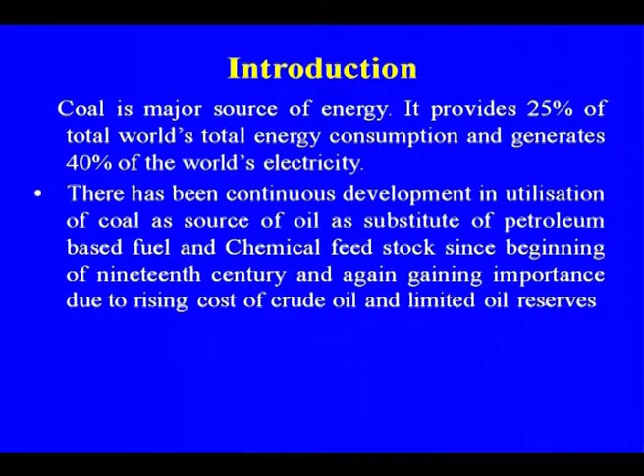As you know, coal is the major source of energy. It provides 25% of the total world energy consumption and generates 40% of the world's electricity. There has been continuous development in the utilization of coal as source of oil, as substitute of petroleum based fuel and chemical feedstock since the beginning of the 19th century, and again gaining importance due to rising cost of crude oil and limited oil reserves. Most of the chemicals derived from coal were obtained by destructive distillation of coal.

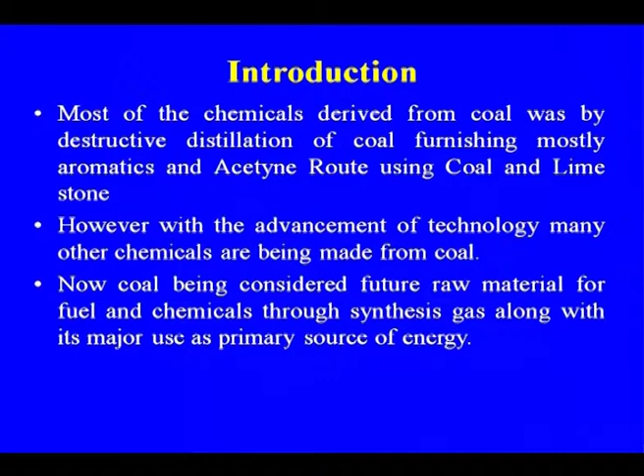This furnished mostly aromatic and acetylene route using coal and limestone. However, with the advancement of technology, many other chemicals are being made from coal. Now, coal is being considered a future raw material for fuel and chemicals through synthesis gas, along with its major use as primary source of energy.

One question comes to mind: why coal as a chemical feedstock? Because from the very beginning of the 19th century, before the coming of petroleum and petrochemicals, coal was the route from which we were producing many chemicals, especially aromatics. Even some of the inorganic chemicals were produced from the coke oven plant. So this was the route, and this is the reason why people are again having interest.

Even coal to liquid technology was developed during the 1930s - the Germans worked on the production of gasoline from coal, but only because of economic reasons and with the availability of crude and petroleum, the process was not actually commercialized.

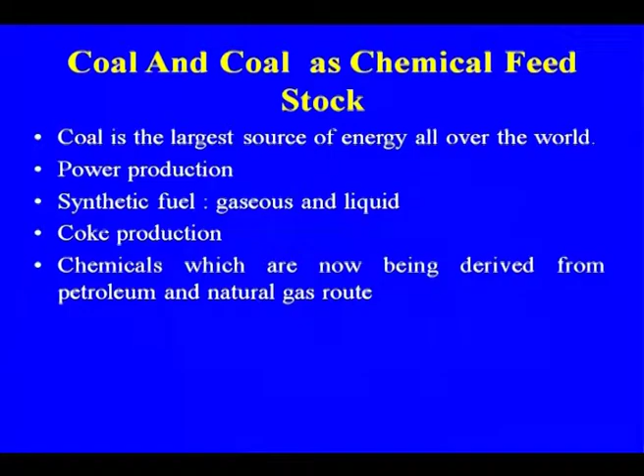As I discussed earlier, coal is the largest source of energy all over the world for power production, but other routes use coal for synthetic fuel, that may be in the form of gaseous and liquid, or coke production - in the coke oven plant where we produce coke from coal, and during the production of coke we generate coke oven gas.

Chemicals which are now being derived from petroleum and natural gas route can be produced from coal through the synthesis gas route or through the calcium carbide route.

Recent development in utilization of coal gasification is being used as a fuel - from synthesis gas to FT synthesis and fertilizer feedstock.

We already have 2 fertilizer plants based on coal during the initial stage of development of the fertilizer industry in India - one in Ramagundam, another in Talcher - but because of economic reasons, these 2 units, being low capacity, have been closed.

Coal to synthesis gas gives us ammonia and other chemicals that we make from synthesis gas. Synthesis gas means when we take hydrogen and nitrogen from the synthesis gas, it then goes through the fertilizer plant for the making of ammonia. As you know, ammonia is one of the major feedstocks not only for the chemical fertilizer industry, but also for the chemical industry.

Coal to oil through FT synthesis - as I told you earlier, a lot of work was done during the initial stages, but only because of economic reasons the process could not be commercialized. But again there has been recent interest in this.

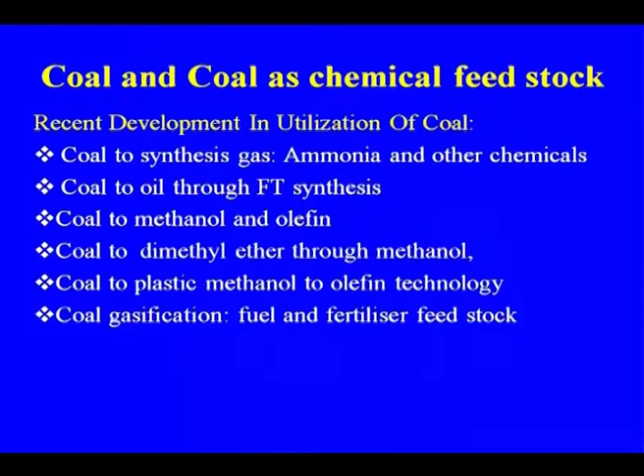Coal to dimethyl ether through the methanol route is also getting important because dimethyl ether can be directly blended with gasoline. Coal to plastic through the methanol to olefin technology - during the process we produce propylene, and propylene to plastic, or even ethylene is also produced in the process.

So for coal to plastic technology, China is already going to have a plant based on the coal to plastic technology.

Coal and coal as chemical feedstock - these future technologies are likely to play an important role in providing alternate feedstock for the chemical industry.

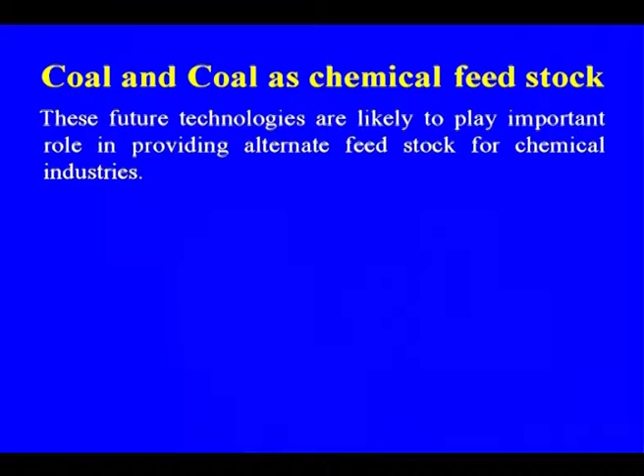Let us discuss now, in very brief, about the coal origin and composition. Coal is the carbonaceous solid black or brownish black sedimentary rock matter, originated from the accumulation of partially decomposed vegetation through biological changes.

Formation of coal started 250 to 300 million years ago, and that took a long time. The coal you are seeing now in this form took around 250 to 300 million years. Biological changes and subsequent effects of temperature and pressure altered these deposits to coal.

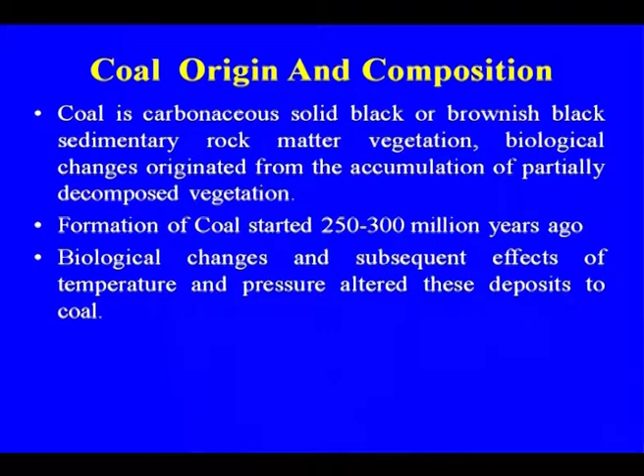Coal is composed chiefly of carbon and other elements like hydrogen, sulfur, oxygen, nitrogen, moisture, and non-combustible inorganic matter containing silica, iron, calcium, magnesium and mercury.

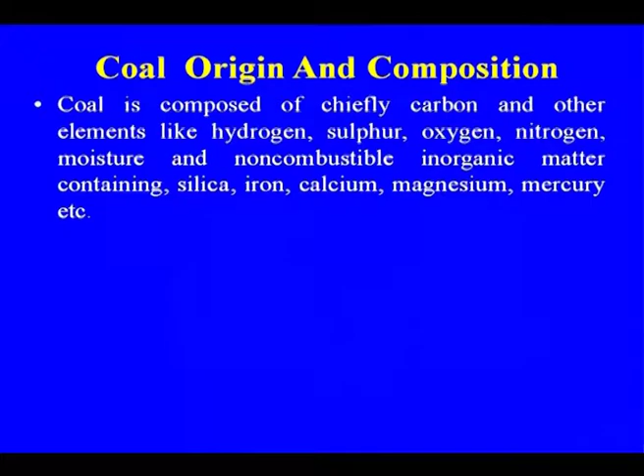Mercury emission was not a problem earlier from thermal power plants, but in many coals the amount of mercury is very high, and mercury emission has been reported in thermal power plants. So mercury is again a problem, especially in case of thermal power plants.

So for the coal composition, as you are seeing here, we have carbon and hydrogen. Apart from this, some undesirable part is also there, that is the sulfur, which is creating a lot of problem.

The sulfur content in coal varies widely from one place to another. If you take the case of Assam coal, it contains very high sulfur. The other matter creating problems are silica, iron, calcium, magnesium compounds, which come out after the burning or gasification of the coal.

That is a big problem where the ash content is high, as in our country the ash content is very high, varying from 30 to 40% in major coal reservoirs.

Coal is a highly complex and heterogeneous substance with a wide range of composition. The composition, sulfur content, mercury content, and calorific value of coal vary widely from one coal reserve to another. Coal may be hard or slightly softer depending upon the source.

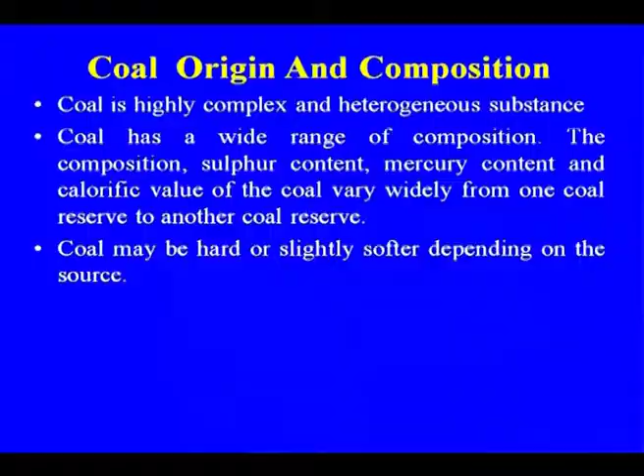Assam coal is much softer than other coal, and that was the problem in utilization of Assam coal in the initial stage when we tried to use it in the boiler.

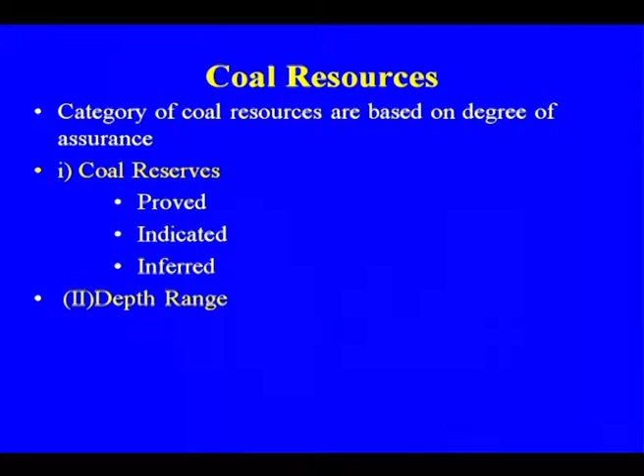Coal resources are categorized based on the degree of assurance, that is coal reserve - proved reserve, indicated or inferred - or based on the depth range. So these are the two bases for categorization of coal resources.

Let us discuss the definitions. Proved reserve is the coal resource which has been reliably estimated and can be recovered economically. Indicated reserve means coal resource based on a combination of direct measurement and reasonable geological assumption.

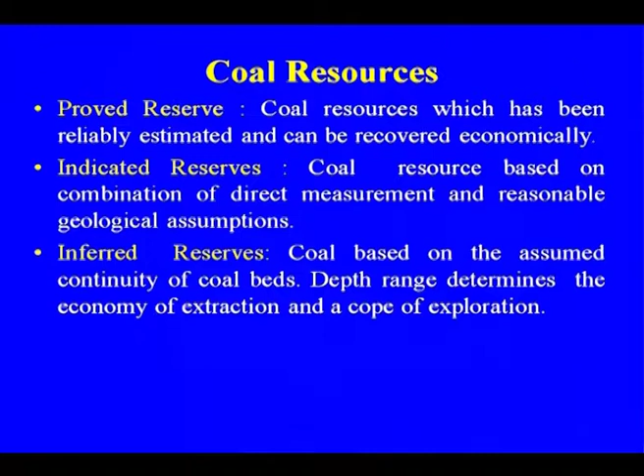Inferred reserve is coal based on the assumed continuity of the coal beds. Depth range determines the economy of extraction and the scope of exploration.

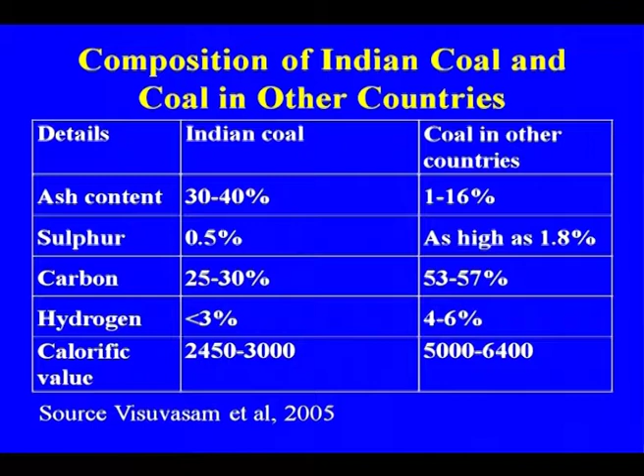Coal reserve: world's proven coal reserves are estimated at about 860 billion tons, expected to last about 120 years at the current level of production and utilization. The global coal reserves consist of 53% anthracite and bituminous coal, 30% sub-bituminous coal, and the remainder irregular lignite.

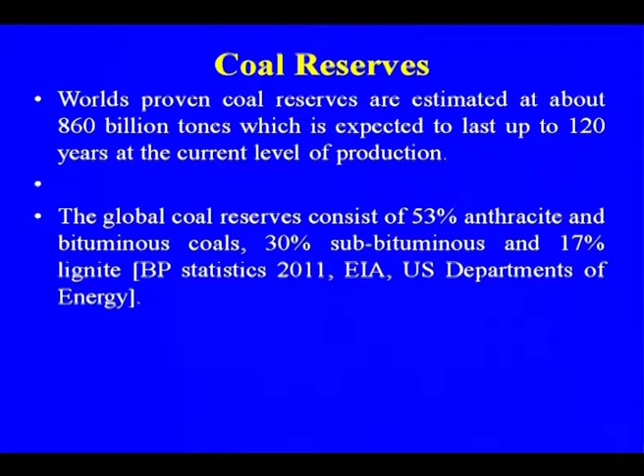The largest coal reserves are in China, USA, Russia, Australia and India. India has the 5th largest coal reserve in the world.

Of the total coal reserve, nearly 88% are non-coking coal reserves, while tertiary coal reserves account for about 0.5%, and the balance is coking coal.

Coal deposits are chiefly located in Jharkhand, Odisha, Chhattisgarh, West Bengal, Madhya Pradesh, Andhra Pradesh and Maharashtra in India.

Coal reserves from India up to a depth of 1200 meters have been estimated to be 276.81 billion tons as on April 1, 2010.

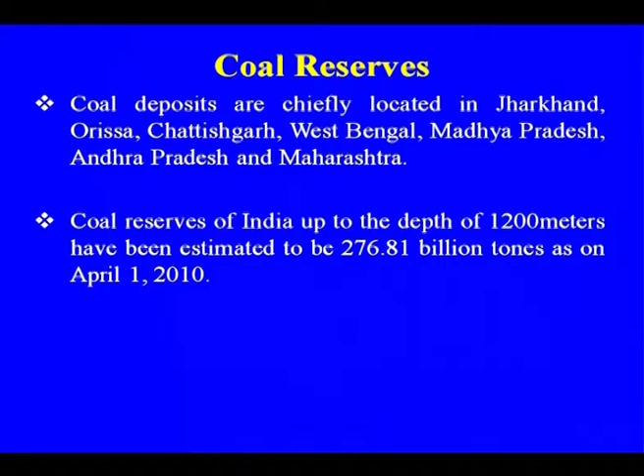The global coal production in 2011 was 7 billion tons, of which China accounted for approximately half of the production and consumption. This is the reason the coal in China is now also being used for production of chemicals. Total coal production in India during 2009-10 was 532.29 million tons.

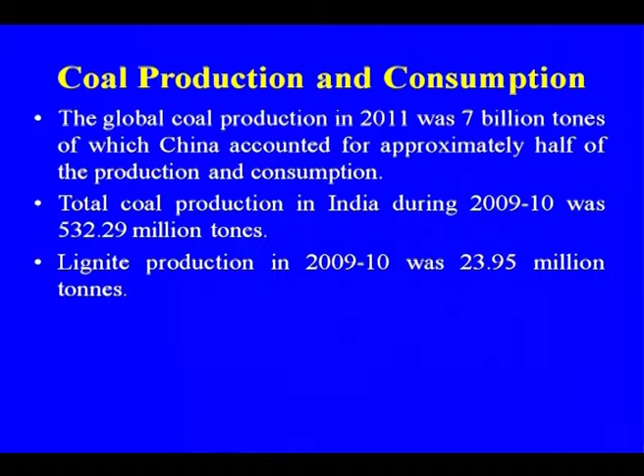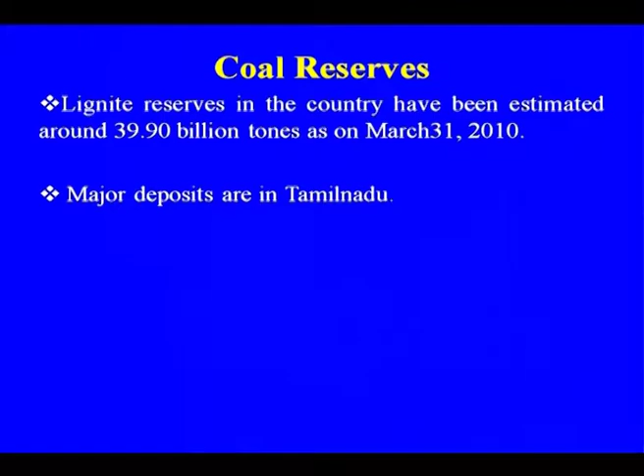Lignite production in 2009-10 was 23.95 million tons. Lignite reserves in the country have been estimated around 39.9 billion tons as on March 31, 2010, and major deposits are in Tamil Nadu, where some plants use lignite as a source of power and as a source of chemicals.

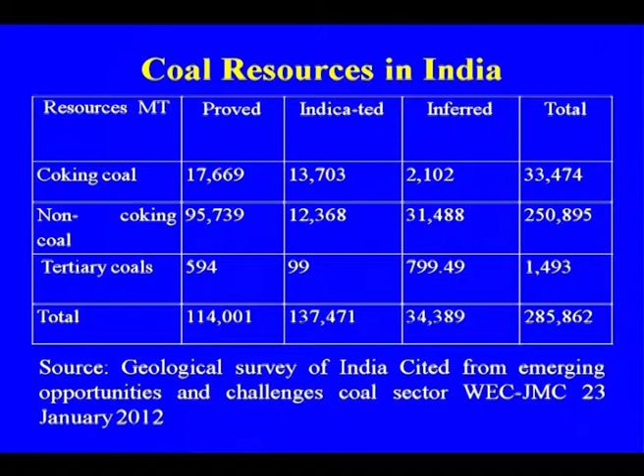This is the status of coal reserve in India: coking coal, non-coking coal, tertiary coal, and total coal that is proved and indicated, along with coal demand projections for the plan years. These are some of the figures available, so you can get an idea about the coal demand during the next few years.

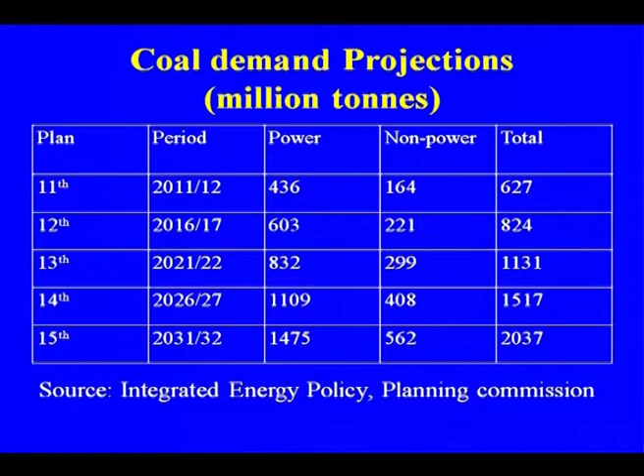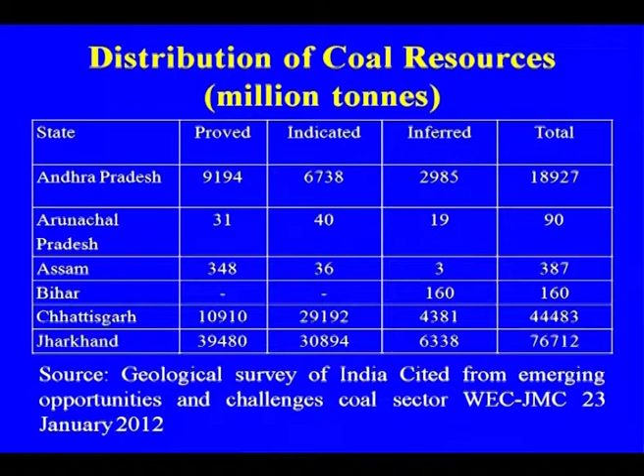This is the distribution of coal reserves in various states: Andhra Pradesh, Arunachal Pradesh, Assam, Bihar, Chhattisgarh, Jharkhand, and Madhya Pradesh, showing proved, indicated, inferred and total amounts. This is the coal reserve we have in India. Figures may vary depending on the source, and coal reserves occur in sedimentary rocks as Gondwana coals and tertiary coal. This includes 456 million tons in inferred resources established through mapping in the northeastern region.

Coal letters of assurance have been given to the power, iron and steel sector, small and isolated plants, cement plants, and ultra mega power projects, and this is the total number of blocks that have been given letters of assurance.

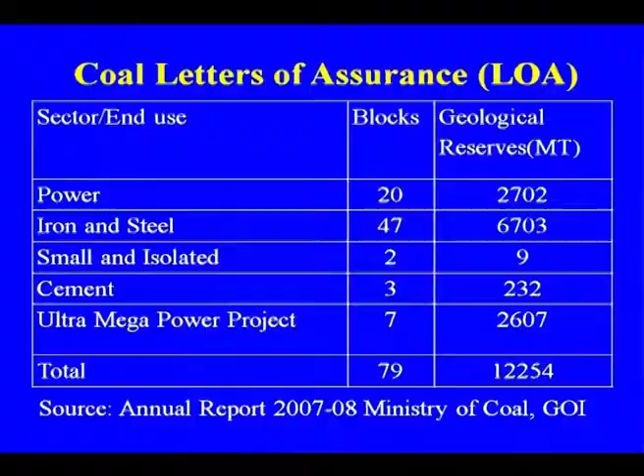Coal bed methane is generating decent interest because it is an environmentally friendly clean fuel similar to natural gas. Preliminary exploration activities for CBM in India started in the early 1990s, and by 1997 the Ministry of Coal had allotted some coal-bearing areas for CBM exploration. As of now, about 250 BCM reserves have been established in 5 CBM blocks, with gas production of about 2 lakh cubic meters per day.

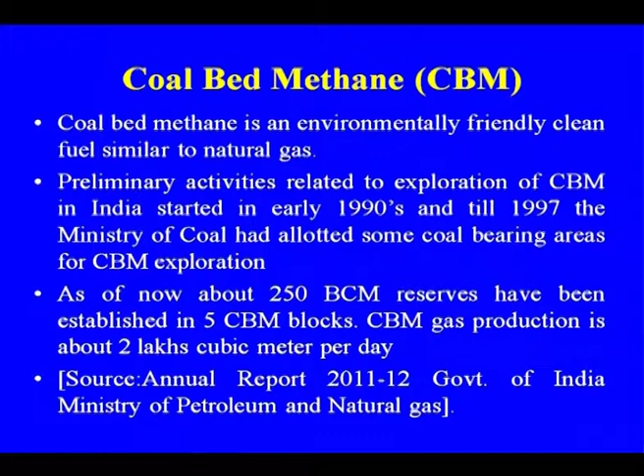This shows the blocks awarded under the program across round 1, round 2, and round 3 exploration, totaling 26 blocks, along with the area awarded, total CBM resources, and CBM wells. These are some of the figures available from the Ministry of Coal.

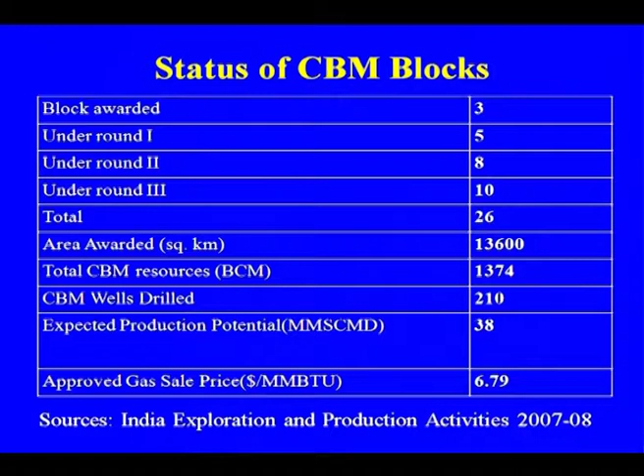There are different types of coal, classified into various grades based on composition, calorific value, and the degree of coalification that occurred during formation. Coal may also be classified as hard or soft, low sulfur or high sulfur. It can also be classified by rock types based on petrological components known as macerals — Clarain, Durain, Fusain, and Vitrain.

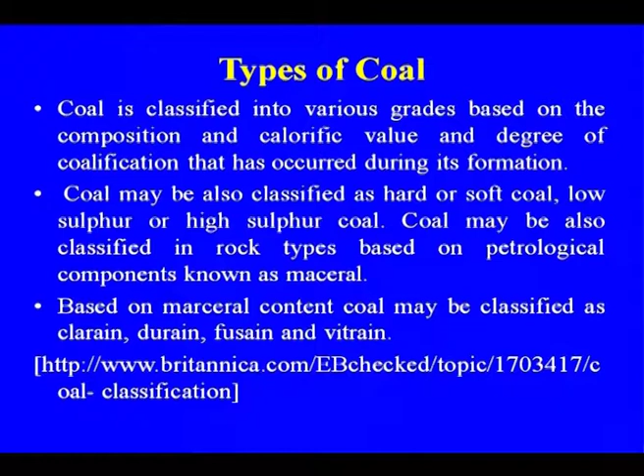One general classification of coal, used everywhere, is given in the form of peat, lignite, subbituminous, bituminous, and anthracite coal. We will discuss this general classification. Peat is the precursor of coal formation; initially it exists as peat, and conversion proceeds from peat to lignite, lignite to subbituminous to bituminous, and then to anthracite.

Lignite forms when, with further increase in temperature during coal formation, peat is converted to lignite. Lignite is considered immature coal, brownish in color, soft, with low calorific value, and compact in texture.

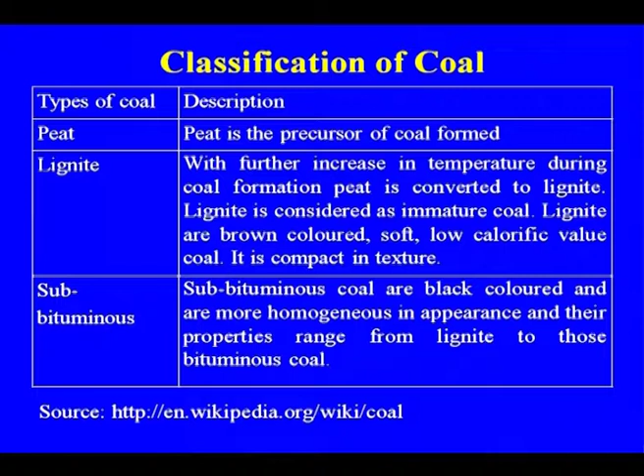Subbituminous coal is black colored and more homogeneous in appearance, with properties ranging between lignite and bituminous coal. Bituminous coal is usually black with high carbon content and high calorific value.

Anthracite coal is the highest rank coal, harder, glassy black, with the highest carbon content and calorific value. It is best suited for making metallurgical coke, for gasification to produce synthesis gas, and for combustion as fuel for power generation. Its ash content is also low. Graphite is the highest rank form and is difficult to ignite.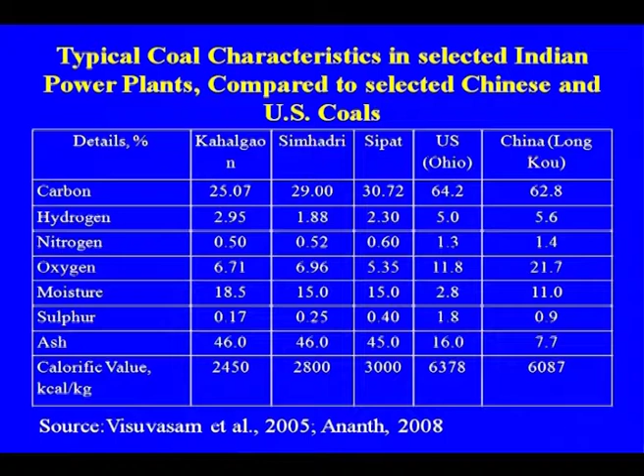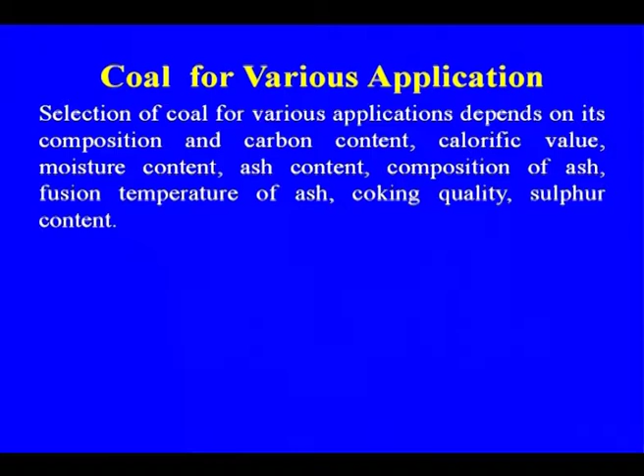Selection of coal for various applications depends on its composition and carbon content, calorific value, moisture content, ash content, composition of ash, fusion temperature of ash, coking quality, and sulfur content.

Regarding assessment of coal quality: coal quality plays an important role in efficient utilization as fuel and for gasification. It should have high calorific value, high carbon content, and low ash content — this is always desirable, otherwise the economics of the process will be affected. Low sulfur content, low moisture, and low cost are also desired. The quality of coal depends on its rank, which is arranged in ascending order as lignite, subbituminous, bituminous coal, and anthracite.

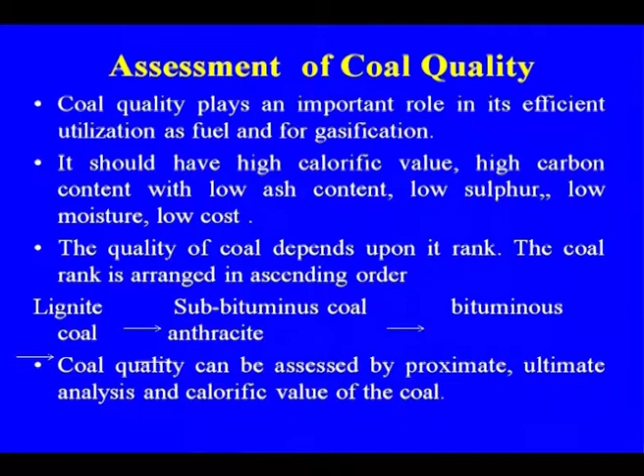Coal quality can be assessed by two methods: proximate and ultimate analysis, and the calorific value. Proximate analysis involves determination of moisture, volatile matter, ash and fixed carbon. Ultimate analysis involves determination of carbon, hydrogen, nitrogen, sulfur and oxygen. Calorific value includes the lower calorific value, higher calorific value, gross calorific value, and the useful heating value.

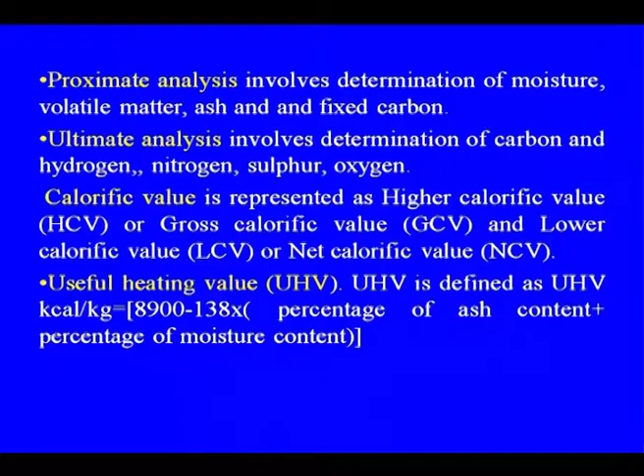Coal as a fuel: major portion of coal is used as fuel for power generation, but other routes are also available, such as coal being used as a liquid fuel. Coal accounts for 53% of commercial energy sources in India, which is high compared to the world average of 30%.

The 11th plan projects India's coal demand to grow at 9.7% per annum against 5.7% during the 10th plan, almost a twofold increase. Commercial coal in India is mainly consumed by the power sector, steel sector and cement sector. So the major share is power plants, steel plants and cement.

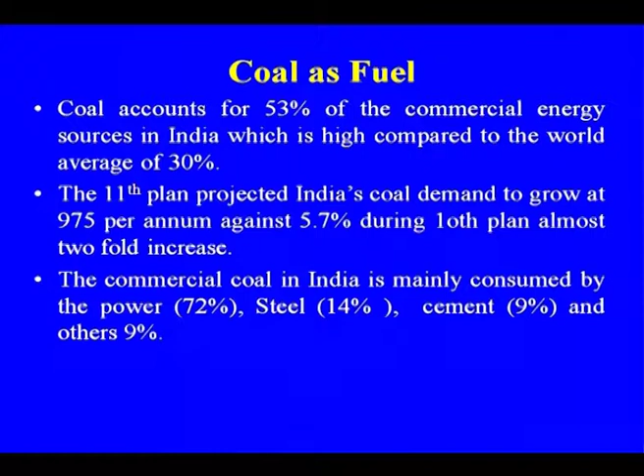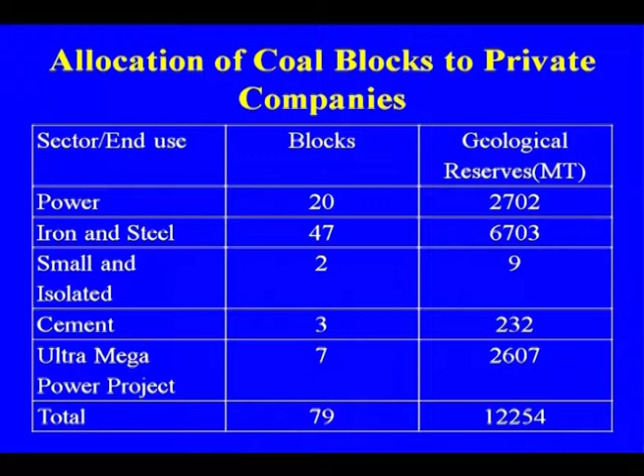Now we will discuss coal as a chemical feedstock. Why is coal important as a chemical feedstock? Coal was originally utilized as a fuel for production of gases - you must be knowing about producer gas, town gas, blue gas. These were some of the products through the gasification route that was being used.

Many petrochemicals now derived from petroleum and natural gas were earlier derived from coal, especially from coke oven plants, because aromatics like benzene, toluene, xylene and a large number of other organic chemicals are present in coke oven gases. We get these either through coal tar distillation or separation of benzene, and this was an important source of aromatics during that time.

The only issue is that in the case of coke oven plants, the yield of aromatics is comparatively low.

With the starting of coke oven plants, it became a source of organic and some inorganic chemicals, because coke oven gases also contain ammonia, and that ammonia is utilized by steel plants for making either ammonium sulfate or ammonium nitrate.

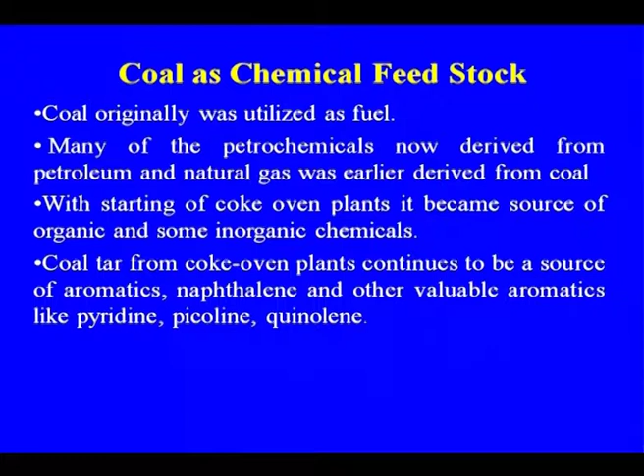Coal tar from coke oven plants continues to be the source of aromatics - naphthalene and other valuable aromatics like pyridine, picoline, quinoline. This is only a selected list of important aromatics; apart from these, a large number of other aromatics are present in the coal tar that we get from coke oven plants.

Before the advent of petrochemical production, a large number of organic chemicals were produced from acetylene produced via the calcium carbide route, in which coal was an important feedstock.

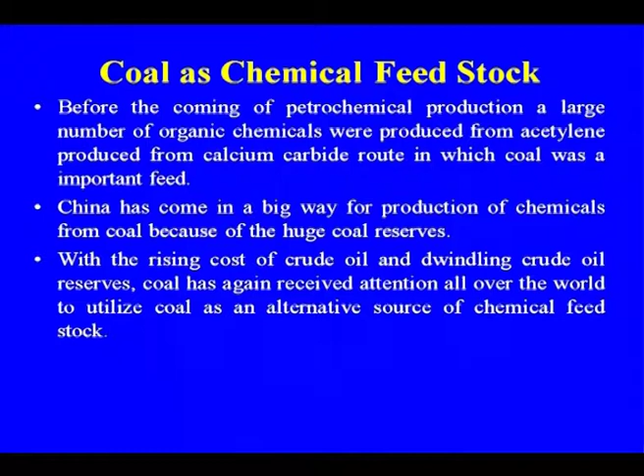China has come in a big way for production of chemicals from coal because of its huge coal reserves and better quality coal. With the rising cost of crude oil and dwindling crude oil reserves, coal has again received attention all over the world as an alternative source of chemical feedstock - not only in developing countries, but also in developed countries. In India too, we are working to utilize coal for production of chemicals through the gasification route.

Various routes for production of organic and inorganic chemicals include: coal carbonization and coal tar distillation, coal gasification, use of synthesis gas as feedstock for ammonia production, coal liquefaction by hydrogenation, and acetylene from the calcium carbide route.

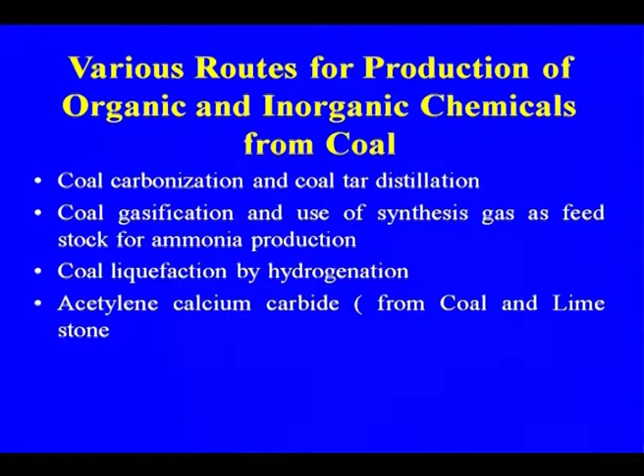Some of the technologies that have gained importance in recent years for utilization of coal include coal to methanol technology, where the intermediate is synthesis gas, and from synthesis gas to methanol. There's also coal to olefin technology, or methanol to olefin technology, again going from coal to methanol and methanol to olefin.

Coal to plastic technology also comes from coal to olefin, and these olefins are used for making plastic. China is already planning a plant based on coal for production of plastic. Acetylene is made from calcium carbide, which is made from lime and coal, and various chemicals are derived from acetylene.

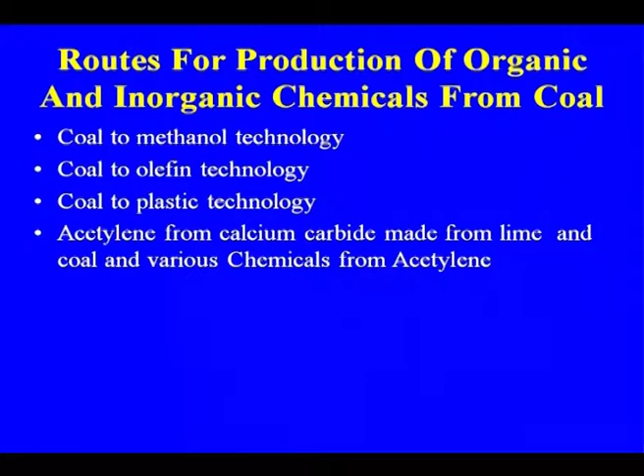We are getting a large number of chemicals from acetylene which were earlier manufactured from the petrochemical route. Now you see how the various processes are involved and what products we are actually getting, and the various coal chemicals, a long list is there.

Coal carbonization: high temperature and low temperature carbonization, two types of carbonization we are taking, and we are getting coke, gases, and coal tar that we are using for production of various inorganic and organic compounds.

Ammonium sulfate is one of the very important parts of any steel making plant, because in many steel plants they are making ammonium sulfate or ammonium nitrate, pyridine bases, ammonium thiocyanate, fuel gas, then solvent naphtha, benzene, toluene, xylene, indene, all this from the light oil, pitch coke.

Road tar, crude naphthalene, because naphthalene was earlier the route for making phthalic anhydride. Now we are making phthalic anhydride through the orthoxylene route.

Then coal gasification, of course the synthesis gas, and through the synthesis gas: ammonia, methanol, oxosynthesis, Fischer-Tropsch synthesis conversion, tar and oils for phenols and cresols.

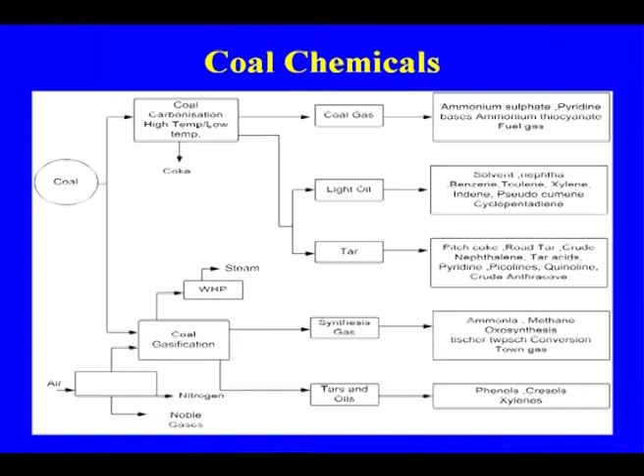Coal based fertilizer plants, because as I told you, coal has been a very important source for manufacture of synthesis gas, and coal gasification use of synthesis gas as feedstock for production of ammonia has again received attention, because we had two units earlier and started manufacture of ammonia.

Urea at our Ramagundam and Talcher plants of FCI, which was later closed because large numbers of fertilizer plants came based on natural gas or naphtha, and they were more economical. So partial oxidation of coal is used for production of synthesis gas and ammonia.

CO from the partial oxidation is converted to CO2, which is used for urea manufacture. That is the process we use in case of ammonia manufacture and urea manufacture. Synthesis gas is used as chemical feedstock for production of a large number of chemicals.

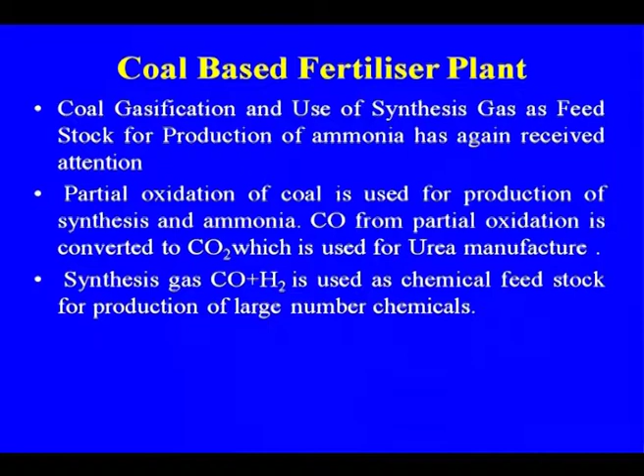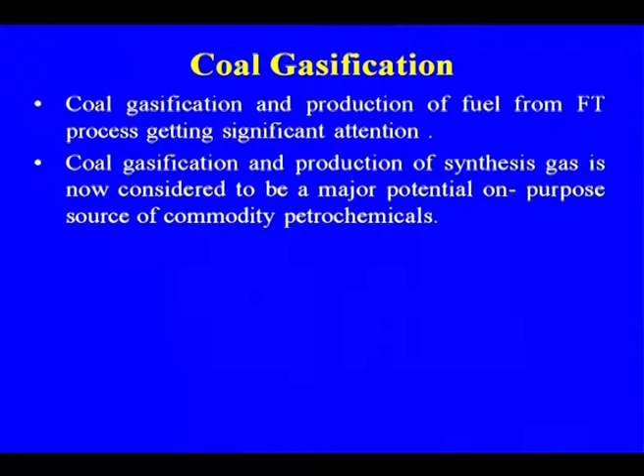Coal gasification has become one of the important sources for producing fuel and synthesis gas. Production of fuel from Fischer-Tropsch synthesis is getting significant attention in recent years. Coal gasification and production of synthesis gas is now considered a major potential on-purpose source of commodity petrochemicals, which are now being produced through the crude oil route or from petroleum.

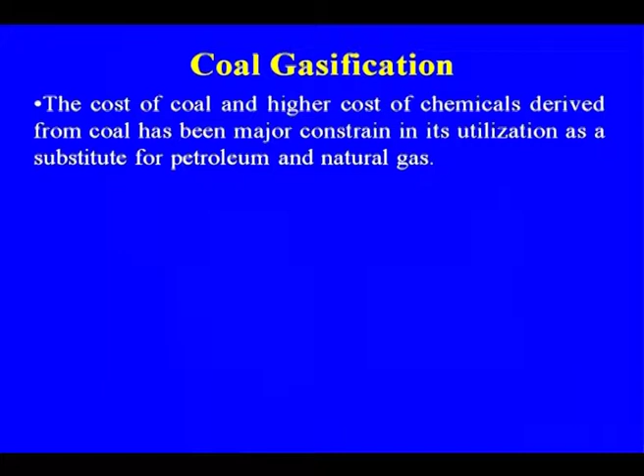Coal gasification: the cost of coal and higher cost of chemicals derived from coal has been a major constraint in its utilization as a substitute for petroleum and natural gas, because the synthesis gas which we are getting from naphtha or natural gas is much cheaper.

Even comparing the cost of production, fertilizer plants based on coal versus fertilizer plants based on natural gas, the cost is more in case of coal than natural gas. It is just in ascending order: if you take natural gas, then naphtha, then coal.

So much higher cost of production is there in case of coal, and especially in Indian conditions because of the high ash content, that is also one of the reasons for the high cost.

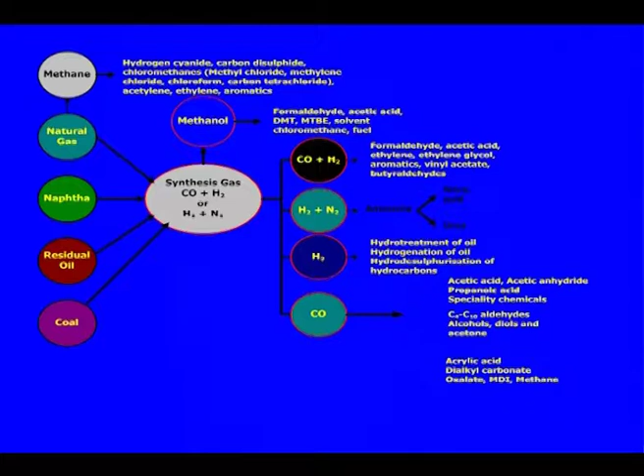Based on CO, these are some of the chemicals: acetic acid, acetic anhydride, propionic acid, acrylic acid. These are some of the major chemicals which are produced from CO or synthesis gas.

Coal conversion technology: coal gasification, coal liquefaction, which may be direct liquefaction or solvent extraction where we are adding solvent and hydrogen, or indirect liquefaction, Fischer-Tropsch synthesis, which may again be high temperature and low temperature. Carbonization, pyrolysis for coke making.

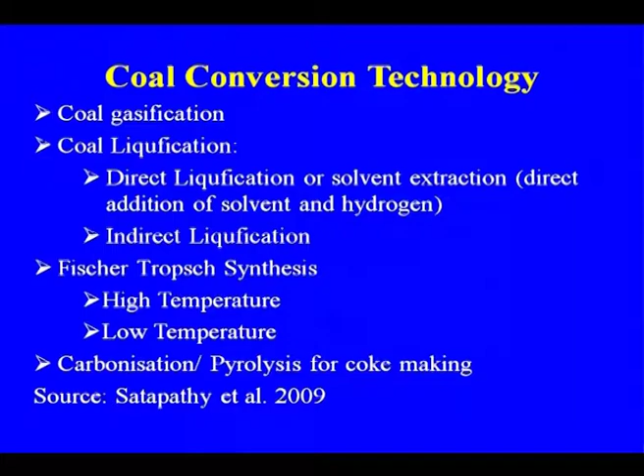As I told you earlier also, calcium carbide and acetylene were the major source of making many of the chemicals, what we now call petrochemicals, because there was no petrochemical industry. If you see when we started the petrochemical refinery, it was in the beginning of the 20th century. It was in 1920 that some of the petrochemicals were recovered from the refinery. So earlier, before the coming of the petrochemical complex, it was calcium carbide, and from calcium carbide to acetylene, and acetylene was used for the manufacture of a large number of chemicals.

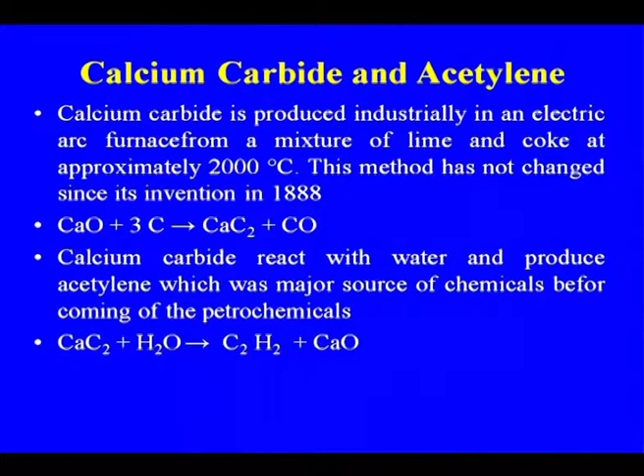So this is the process of calcium carbide and calcium carbide to acetylene production. After adding water, you are producing acetylene, and this CaO again we are regenerating. These are some of the products we get from acetylene: vinyl chloride, polyvinyl chloride, acrylonitrile, acrylic fiber. This was earlier when the cracker plant was not there, because now we are making vinyl chloride from the ethylene which we get from the cracker plant.

Earlier, vinyl chloride from the acetylene route was used for polyvinyl chloride, and still one plant, Shriram Chemicals and Fertilizer at Kota in India, is using the acetylene route for production of vinyl chloride and polyvinyl chloride. Acrylic fiber: acrylonitrile made from the acetylene route was used earlier for acrylic fiber. But now, with the coming of propylene, we are making acrylonitrile through the petrochemical route.

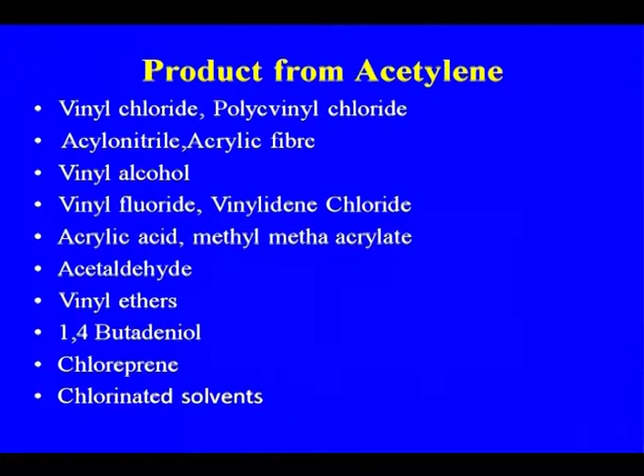Vinyl alcohol, vinyl fluoride, vinylidene chloride, acrylic acid, methyl methacrylate, acetaldehyde, which normally we make through the ethylene or the alcohol route, but earlier the acetylene route technology was available. Vinyl ethers, 1,4-butanediol, chloroprene. For chloroprene also the acetylene route is available, and chlorinated solvents.

Coal to methanol technology: the process involves the production of synthesis gas from coal via partial oxidation, followed by conversion of the synthesis gas to methanol. This is the technology being used for the production of methanol. We will discuss in detail the production of methanol from synthesis gas while discussing petrochemicals in module 7.

Coal to olefin technology. Methanol from synthesis gas from coal gasification can be converted to dimethyl ether using a bifunctional catalyst, which can be used as a gasoline blend, or methanol can be converted to olefins by the MTO process. This process produces ethylene and propylene. Olefin synthesis from synthesis gas via the dimethyl ether to olefin process, SDTO, is also available.

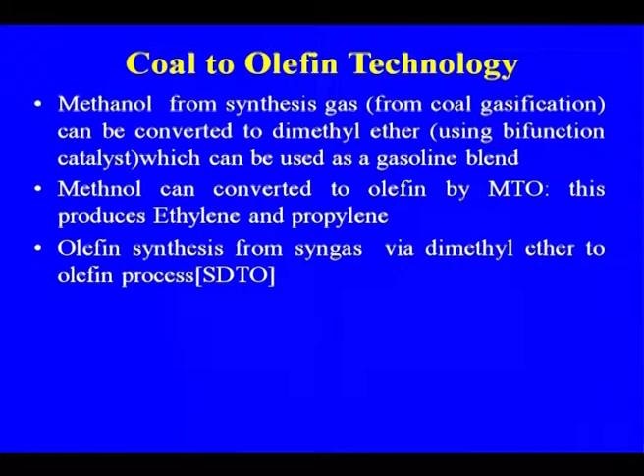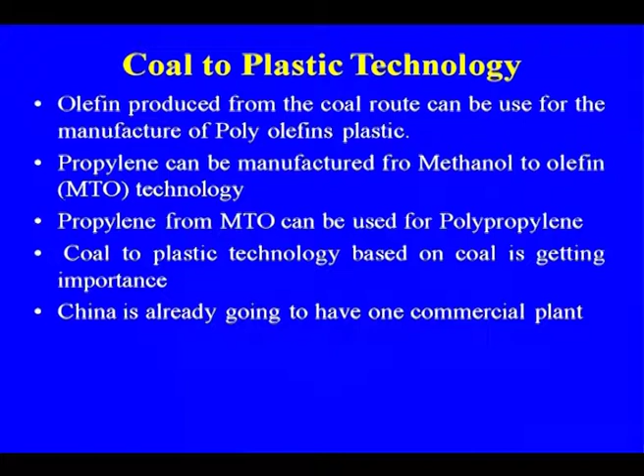Olefins produced from the coal route can be used for the manufacture of polyolefins, that is polyolefin plastics. Propylene can be manufactured from methanol to olefin technology, and propylene from MTO can be used for polypropylene. Coal to plastic technology is getting important. China is already going to have a commercial plant making polyethylene and polypropylene from the coal route.

Major constraints in the coal to chemical route. Variation in coal quality affects the efficiency and economics of gasification. Changes in syngas composition occur due to variation in coal quality, because coal quality varies very widely from one source to another. Take the case of Assam coal: although it has high carbon, it has very high sulfur content. Some coals have very high ash content. So the syngas composition changes due to variation in coal quality.

High ash content of the coal, as in the case of India, high sulfur content, and impurities present in the coal may be detrimental as they may affect the catalyst and the process, because catalyst poisoning may occur due to some of the impurities present in the coal. Environmental considerations such as sulfur content and CO2 sequestration arise in the coal gasification route.

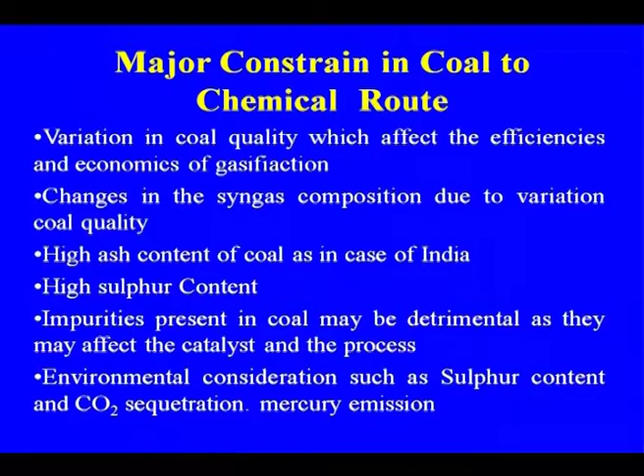Mercury emission is another problem with coal, because some coals have high mercury, and because of mercury emission it has been made mandatory for all thermal power plants to monitor the mercury content of the coal.

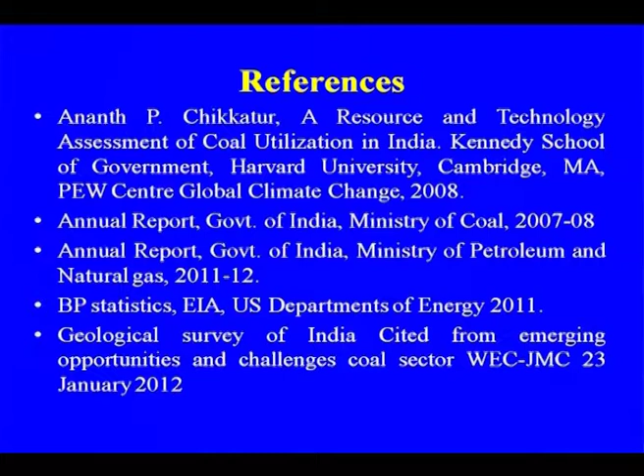So this was about coal as a chemical feedstock. In lecture 2 of module 2, we will discuss the coke oven plant, because that was the starting point of the production of chemicals which we now see through the petrochemical route.